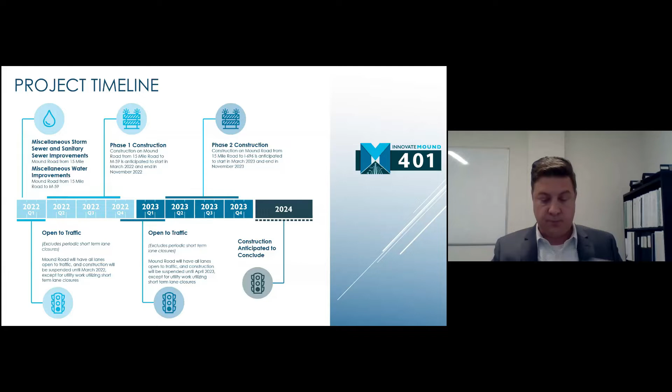So with that, we'll look at the construction activities for 2022. We'll be working in the entire corridor. On the north segment, we'll be reconstructing the roadway from just north of 15 Mile to M59.

Then in the south half, in the late summer of 2022, we'll begin work similar to what was completed last season—temporary widenings and some miscellaneous storm sewer repairs on the south half of the project, in preparation for reconstruction in 2023.

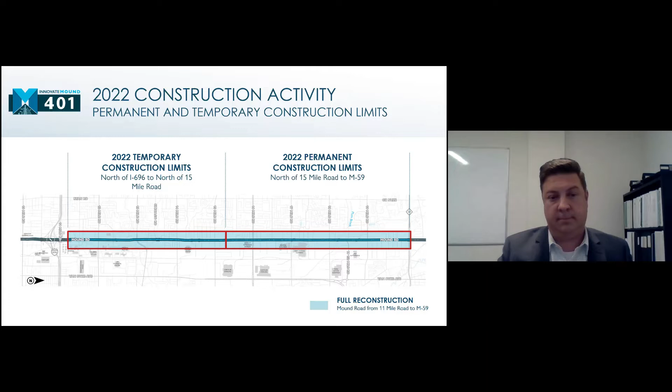This shows the permanent construction activities ongoing in the north segment of the project in 2022. We'll start construction again in March and wrap that up in December 2022.

This work will include reconstruction and widening of Mound Road, widening from 17 Mile to M59, full reconstruction of the pavement including a new open graded drainage course, under drain system, new concrete pavement, installation of new signing, traffic signals, pavement markings, as well as storm sewer repairs, new storm sewer cross leads, and drain structures.

And then the completion of the Mound Road bridges over Plumbrook Creek. Last season we completed the substructure work on those bridges. This year, in early spring, we'll be completing the deck widenings and some other rehab work at those bridges.

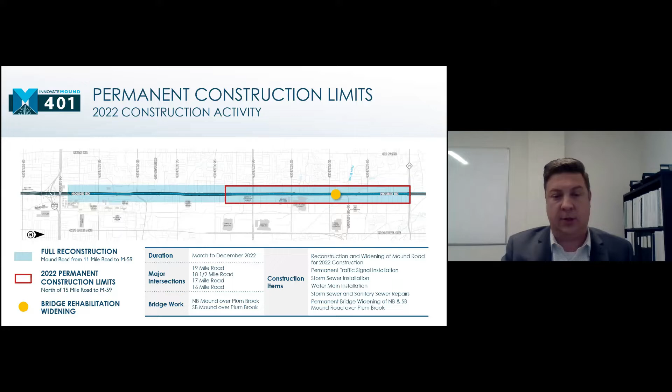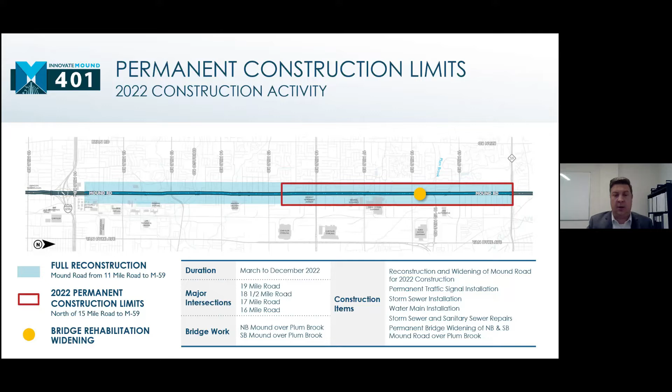This also includes the major intersection reconstructions at 19 Mile, 18.5 Mile, 18 Mile, 17 Mile Road, and the Metro Parkway and Mound Road intersection. During construction, we'll be closing most of the major intersections and detouring traffic. Ryan will cover that in more detail later in the presentation, but we will be maintaining cross traffic along Mound and 16 Mile Road at all times during construction.

The next slide shows the temporary construction limits for 2022. This work will begin in mid-August and run through November and into early December 2022. In this segment, we'll be doing temporary widenings to maintain traffic for the reconstruction in 2023.

Also, we'll be completing storm sewer cross lead installation and beginning some municipal utility repairs in the city of Warren, both water main and sanitary sewers. We'll also be making intersection improvements and widenings for maintaining traffic at 12 Mile, 13 Mile, 14 Mile, and 15 Mile intersections.

We're also currently working with the design builder to look at the potential of getting an early start on some of the structure work on the south end of the project. We're considering construction of the Bear Creek culvert and the McCoy Drain culvert replacements starting in late summer of 2022 as well. As we work through the construction scheduling and logistics, we'll have a better understanding, and we'll provide that in a future Innovate Mound newsletter update.

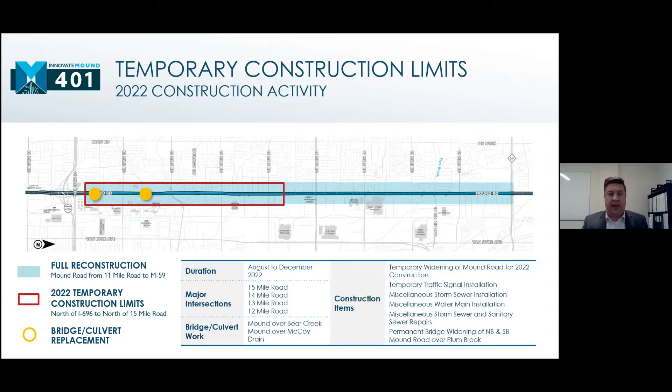So the next slide shows some of the detailed anticipated construction schedule for 2022. Reconstructing both bounds of Mound Road, northbound and southbound, begins in March and runs through August. Then immediately following completion of those outside lanes, we'll be switching traffic and focused on reconstructing the inside lanes as well as the median crossovers.

That work will include intersection work, both during stage 1 and stage 2 construction. We'll also be completing storm sewer, water main and sanitary sewer repairs throughout 2022 in the northern segment of the project, and the bridge work at the Plumbrook Bridge is scheduled to wrap up sometime in early May of 2022.

Moving on to the south segment of the project for the temporary works from 696 up to 15 Mile. That work will begin with temporary widening starting sometime in mid-August and will run through end of November. We'll also have storm sewer, sanitary sewer, water main repairs ongoing in September.

That will run through the seasonal suspension, and then we'll allow temporary lane closures on a daily basis to continue that work in a productive manner and get an early start on 2023 construction.

Water main work will be following shortly after. We anticipate starting that in October. That work will continue through the winter of 2023 as well, similar to how work progressed this season. Finally, we will have cleanup and short-term lane closures in November and December of 2022.

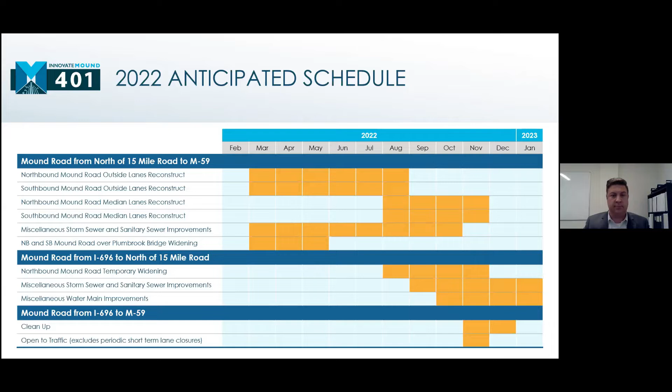Good afternoon, everyone. Steve touched on major construction work scope. Now I'm going to give an overview of some of the features that are important parts of this corridor improvement.

One of those are the detention basins that will be installed from 15 Mile Road to M59 due to the adding of impervious areas, mostly coming from the widening section. To meet federal water quality requirements for stormwater, 8 detention basins will be installed in the median.

The detention basins help to ensure runoff occurs at an acceptable rate. The basin will help increase water infiltration during rain events and ensure that stormwater quality discharging to the waters of the state is maintained. You see on the top picture, view 2, a rendering of what the motoring public would see once vegetation is established around the detention basins.

Michigan native plant species that are tolerant to both wet and dry conditions will be used to ensure the basins operate as expected and maintain the aesthetics for the corridor. On the bottom picture, you will see the cross section of the detention basins.

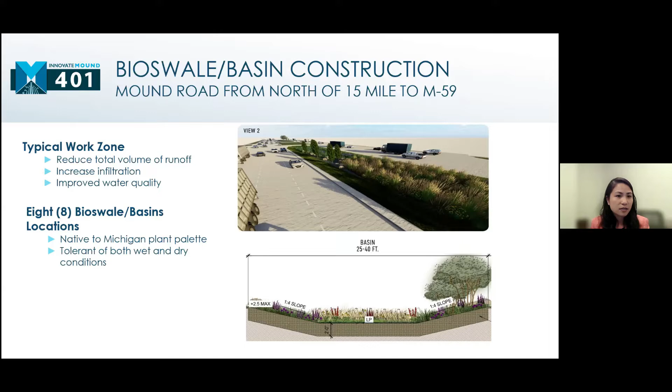On to the utilities work along the corridor. There is a noticeable amount of utility work within the corridor. Steve again touched on the water main and sanitary work that will happen for both the city of Sterling Heights and city of Warren, which will include new installs, replacements, as well as repair and lining of selected segments.

There are also numerous private utility companies within the corridor. Just to name a few, we have DTE, Consumers, AT&T, Verizon, and Comcast. These utility companies have facilities both overhead and underground. In addition to resolving conflicts with construction activities, utility companies are taking this opportunity to upgrade their facilities.

One of the major utilities in the corridor, DTE, will relocate transmission lines and poles mostly to the east side of Mound Road, to accommodate installation of the multi-use path that will be constructed on the west side. Also, instead of wood poles, DTE will install steel poles from 14 to 18 Mile Road.

Communication companies who are mostly DTE shared users will also be relocating to new poles that will be provided by DTE. Another major improvement from a utility company is Consumers, who will be replacing the medium and high pressure gas main in the median from 11 to 14 Mile Road.

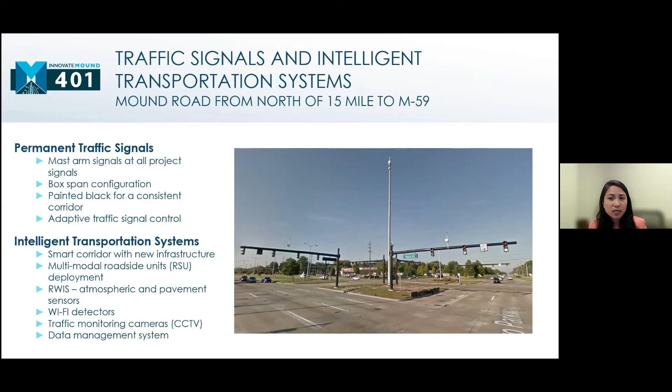Moving on to the road work. Steve has touched on a lot of the major road work scope.

For both the widening and non-widening sections, there will be a continuous multi-use path on the west side of Mound that will mostly be 8 feet wide, although it varies in some areas due to right-of-way restrictions.

On the east side of Mound, sidewalk gaps will be filled in at selected locations based upon review of needs and agreement with the cities. The sidewalk on the east will be 5 feet wide. The median will stay pretty much the same in width to accommodate vehicle turning, especially trucks.

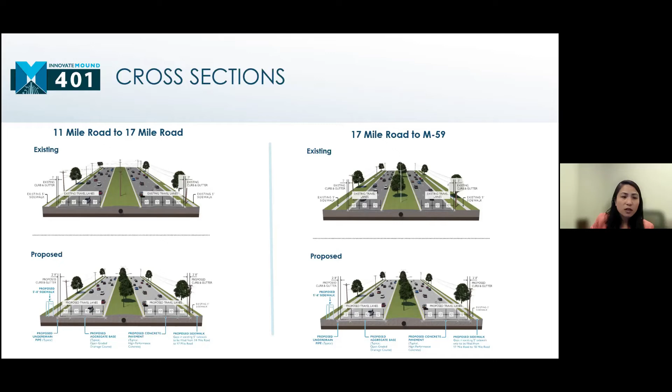Also, driveway access was reviewed. Changes will be constructed as agreed upon. Some of the changes were to consolidate driveways, remove driveways that were not needed, or reconfigure them to improve safer access. These changes will further improve safety within the corridor.

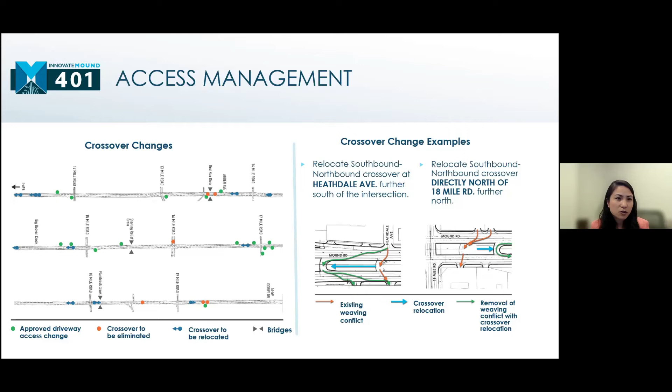Moving on to aesthetics improvements. This project will incorporate many aesthetic features within the historic Warren area. In addition to the landscaping that will be installed throughout the corridor, perennials and ornamental grass will also be planted. There will be enhanced landscaping at intersections, and decorative lighting will also be installed at selected intersections.

Crosswalks will be colored to provide contrast and improve visibility. In the median, evergreens and ornamental trees will also be planted.

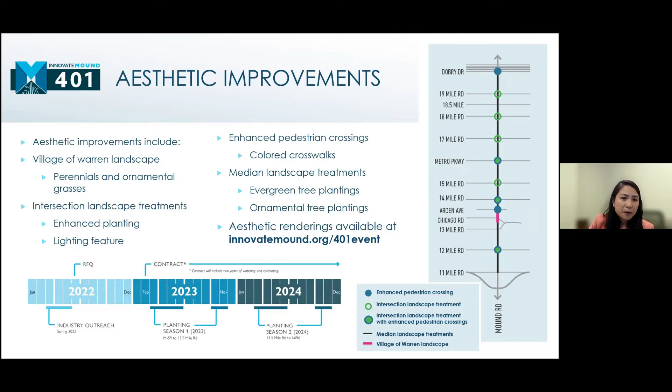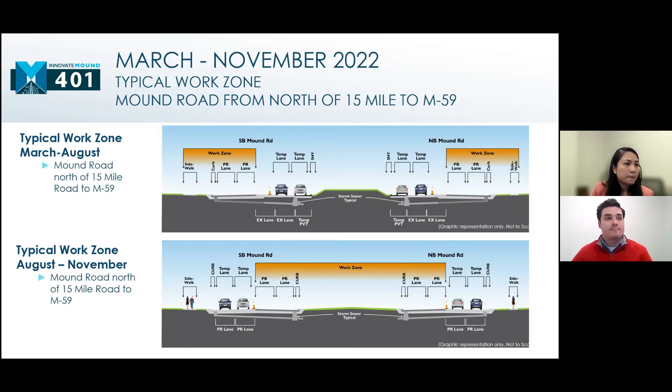And now I will hand it over to Ryan Sarmiento for the construction traffic items. Awesome, thanks Wynn. Good afternoon, everyone.

I'll be covering some additional details regarding the 2022 construction activities as it relates to how the contractor plans on maintaining traffic and access to driveways and side streets during the different stages of work.

On this slide, you will see two different cross sections of northbound and southbound Mound that illustrate how live vehicular traffic will be configured and where the live work zone will be. These illustrations represent the typical work zone along Mound Road from 15 Mile to M59 for the entirety of the 2022 construction season.

The top picture shows how traffic will be configured from roughly March to August of this year, with live vehicular traffic on the two inside lanes nearest to the median, made up of the existing Mound pavement and the temporary asphalt pavement built last year to properly widen the road to accommodate enough room and shy distance between the live traffic and proposed work zone.

With the traffic in this configuration for roughly 5 to 6 months, there will ultimately be impacts to residents and business owners' access. However, our project team is committed to ensuring impacts are minimal and that access will be maintained where possible.

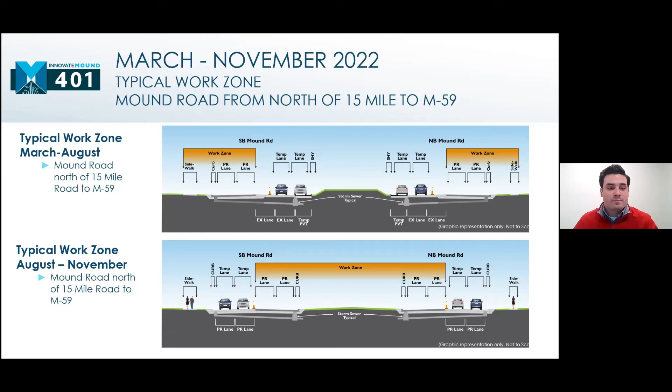This wraps up the typical cross sections for the 2022 construction activities from March to November of 2022. Now we'll take a look at the fall to winter configurations of the south end.

So we'll focus on the south part of the project stretching from 696 to 15 Mile. This will look very similar to the traffic configurations that were in place last year during the temporary widening work from 15.5 Mile to 59.

To conduct similar temporary pavement widenings, storm sewer and water main upgrades and/or repairs, the traffic will be pushed to the outside lanes so that the contractor has enough space to conduct the required work within the median area and the inside 2 lanes.

This work should take place from roughly August to November, when the seasonal suspension takes effect. During the seasonal suspension, we will be in the winter configuration shown on the bottom, which basically depicts the normal Mound Road traffic configuration with the newly installed temporary pavement, which will not have any traffic on it during the winter, but it will be there.

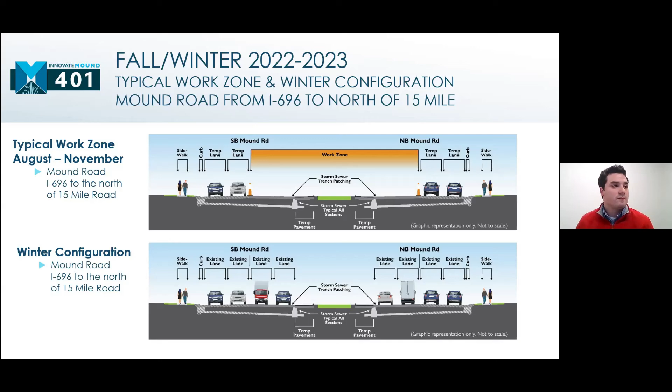During the 2022 construction season from 15 Mile to M59, the contractor will need to perform multiple intersection closures at major Mile Road crossings to conduct reconstruction of the pavement, utilities, etc. These major intersections include 17 Mile, 18 Mile, 18.5 Mile, and 19 Mile Road. On the next couple slides, we will go over the proposed detours for these closures. The contract requires these intersections to be closed no more than 21 days, and for no more than 2 times throughout the construction season.

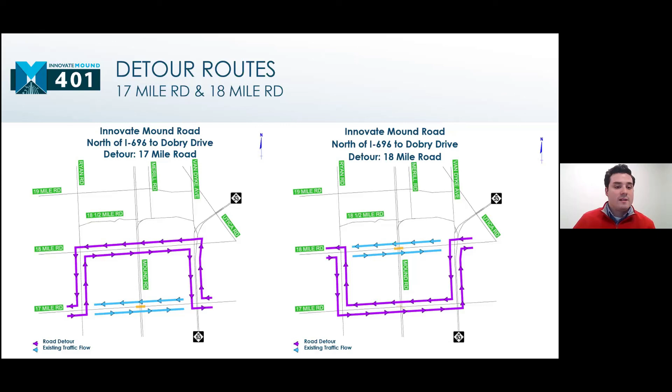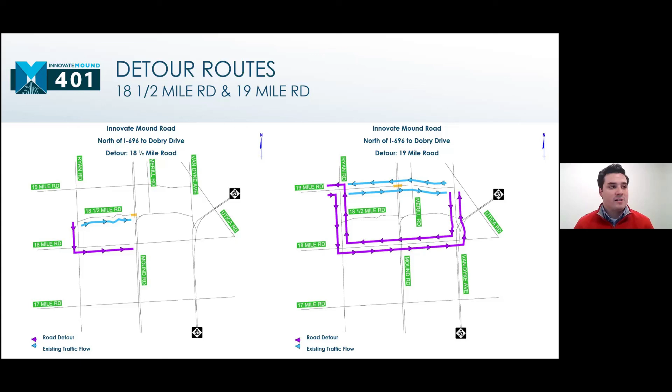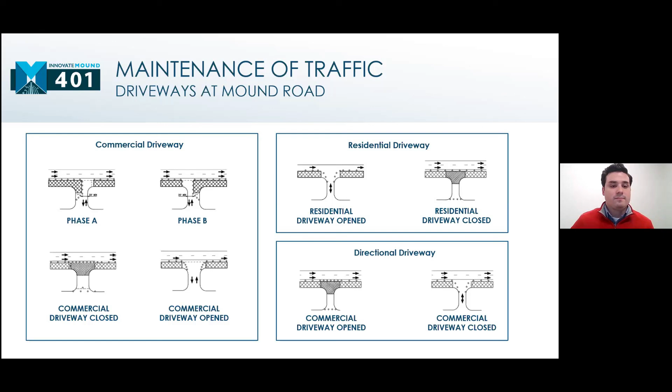If there are any issues, questions, or concerns, as Brian mentioned earlier in the presentation, regarding the Innovate Mound project, please contact our project ombudsman. Here's his name, Jonathan Bailey, who will be available 24 hours, 7 days a week by phone. He will do his best to be on call to answer any questions or concerns you may have.

You can reach him by dialing 1-855-MOUND-FOR-YOU, and then press the number 2 when prompted to get directly to his number. If you would like additional information regarding the project or have any project-specific questions, please feel free to email info@innovatemound.org, and someone on our project team will address your question in a timely manner. With that, I would like to thank everyone for listening.